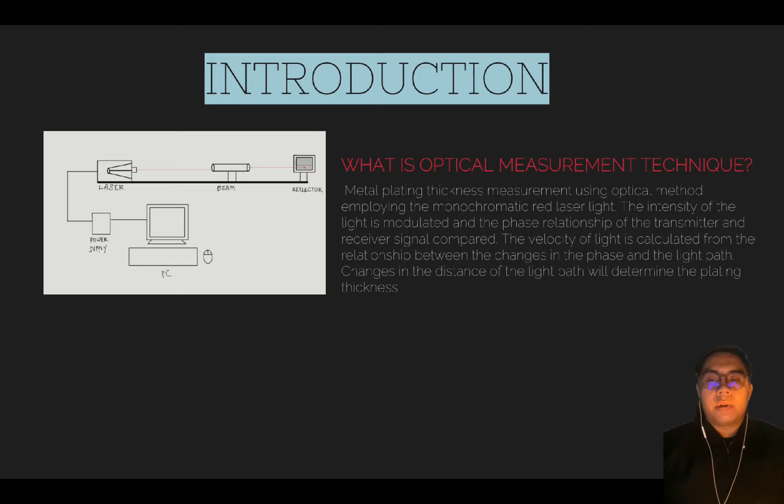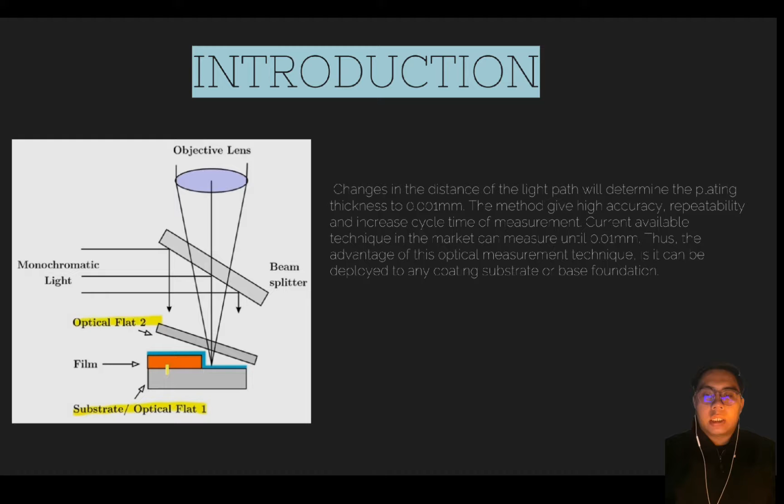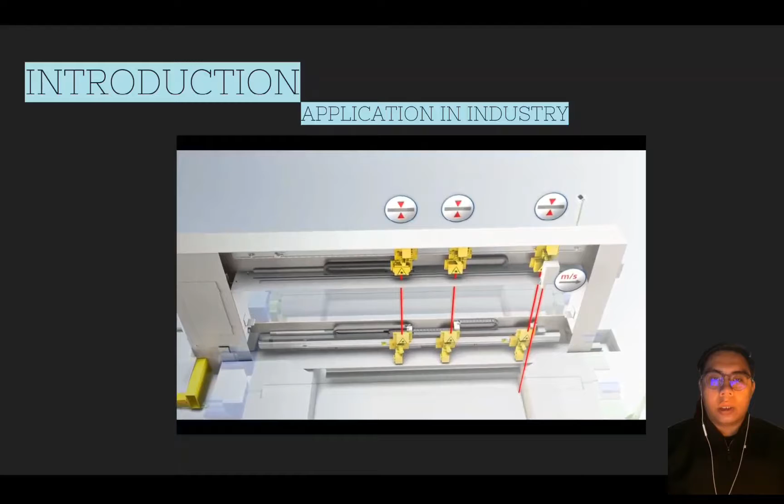Change in the distance of the light path will determine the plating thickness to 0.001 mm. The method gives high accuracy, repeatability, and increased cycle time of measurement. Current available technique in the market can measure until 0.01 mm. Thus, the advantage of this optical measurement technique is it can be deployed to any coating substrate or base foundation. As you can see, there are applications for optical monochromatic light, which is red laser, in the industry to determine or to measure the coating thickness.

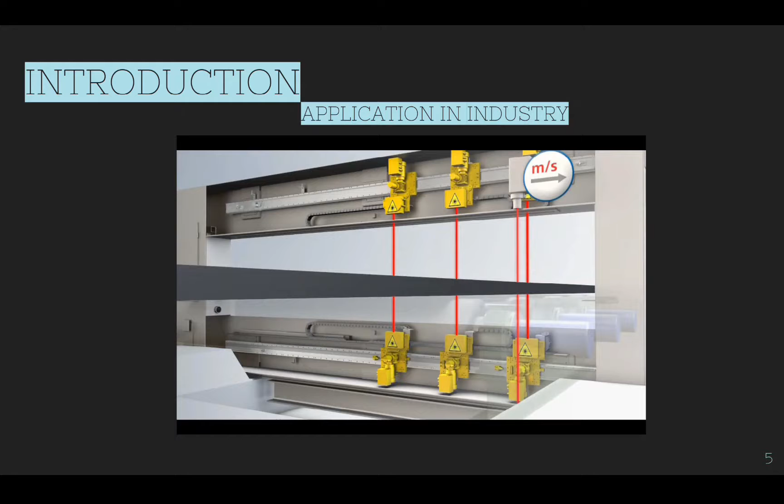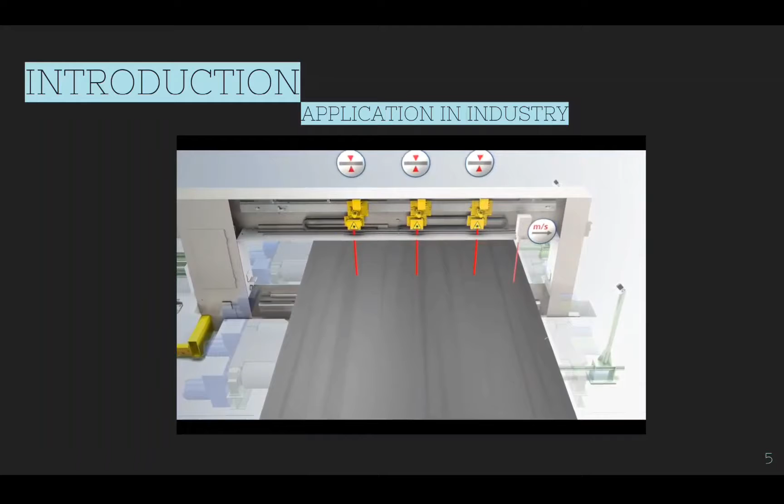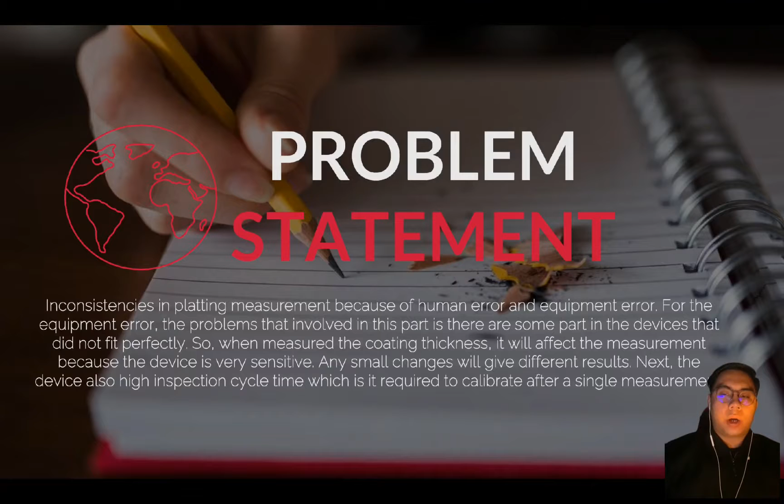For this project, the problem statement is inconsistency in plating measurement because of human error and equipment error. For the equipment error, the problem involved is there are some parts in the device that did not fit perfectly. So when measuring the coating thickness, it will affect the measurement because the device is very sensitive. Any small changes will give different results. Next, the device also has high inspection cycle time, which is it requires calibration after a single measurement.

My target for this project is I want to design a metal plating thickness measurement system with red laser monochromatic light and velocity receiver. Second, I want to improve the accuracy of the plating thickness measurement system to 0.001 mm. And last, I want to improve inspection cycle time compared to the current technique employed by the industry.

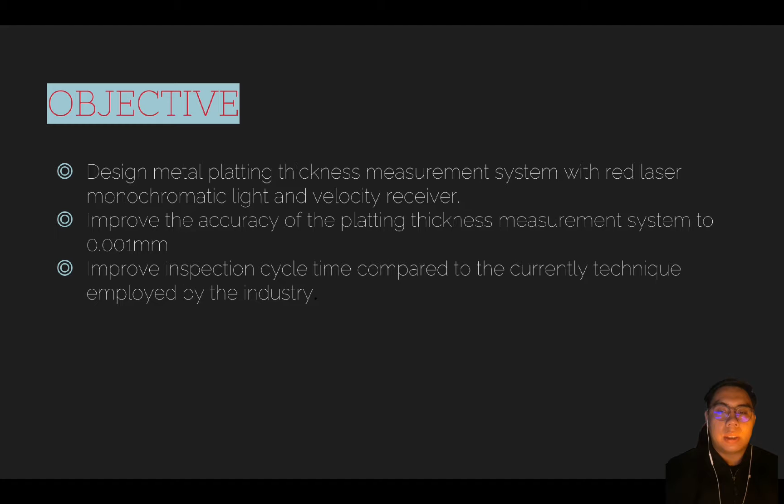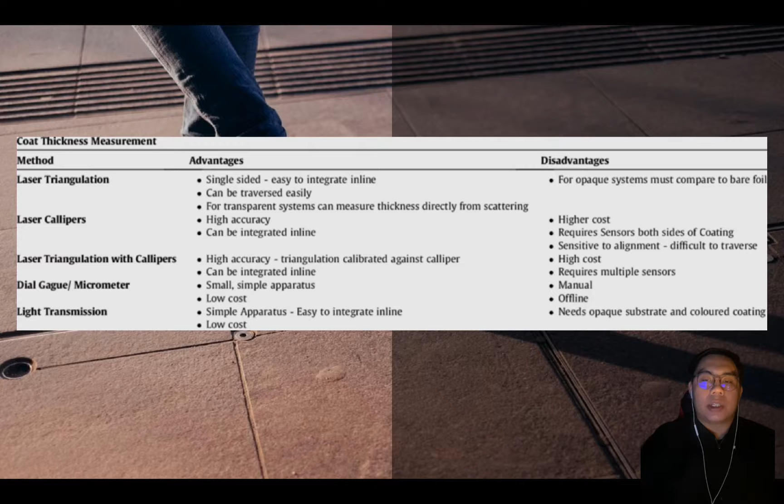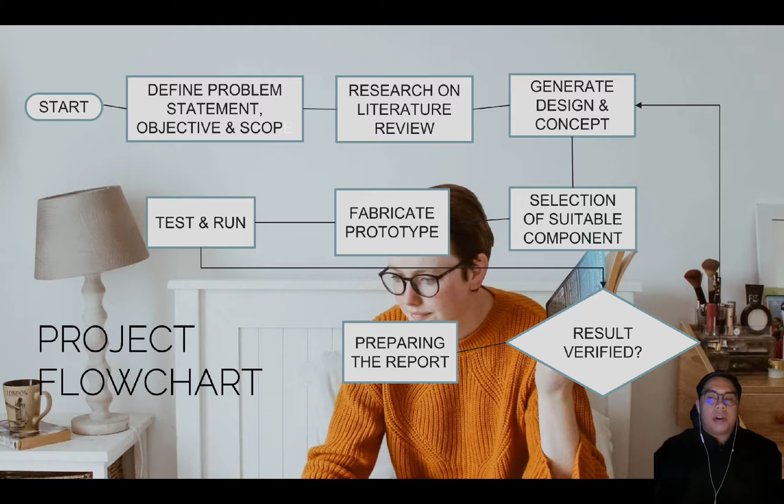This table provides 5 different methods, which are laser triangulation, laser calipers, laser triangulation with calipers, dial gauge or micrometer, and light transmission. For this project, the flowchart starts with define problem statement, objective and scope. Next, research on literature review. Third, generate design and concept. Fourth, selection of suitable component. Fifth, fabricate prototype. Sixth, test and run. Seventh, result verified. And last, preparing the report.

For the system flowchart, it starts with system calibrate, and then it goes to acquisition spectrum of reference mirror or acquisition spectrum within quartz glass, then comparison of central wavelength, and proceed to calculate thickness of quartz glass, while aberration correction for optical device or error correction for refractive index of multi-light.

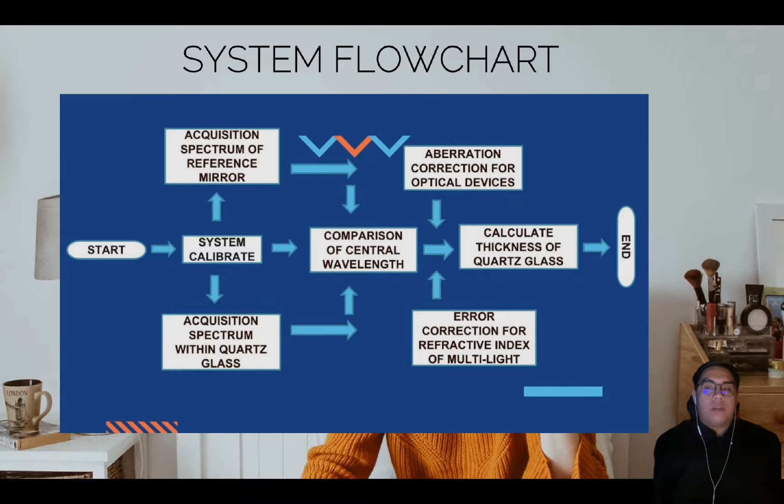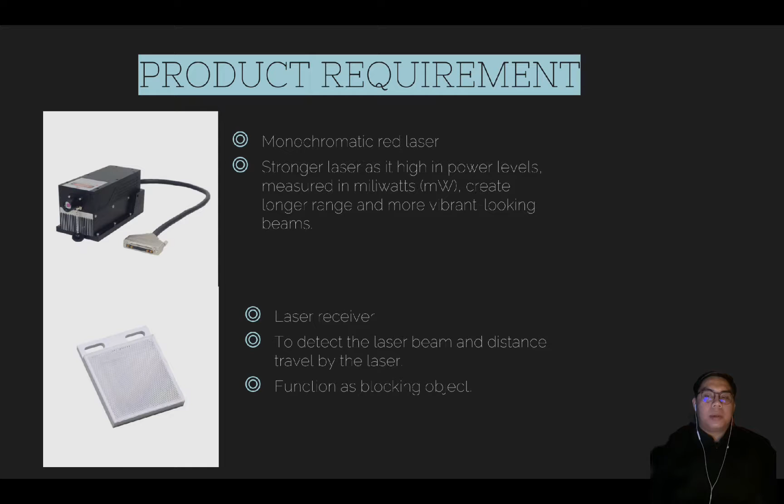Okay, we proceed to the next subtopic, which is methodology. For the product requirement, first, monochromatic red laser. It is a stronger laser as it is high in power level, measured in milliwatts, with longer range and more vibrant looking beams. Second, laser receiver, to detect the laser beam and distance traveled by the laser. It functions as a blocking object. Next, sample measurement holder. It places the sample between the holder and clamps the sample, so the sample stays perfectly still when taking the reading.

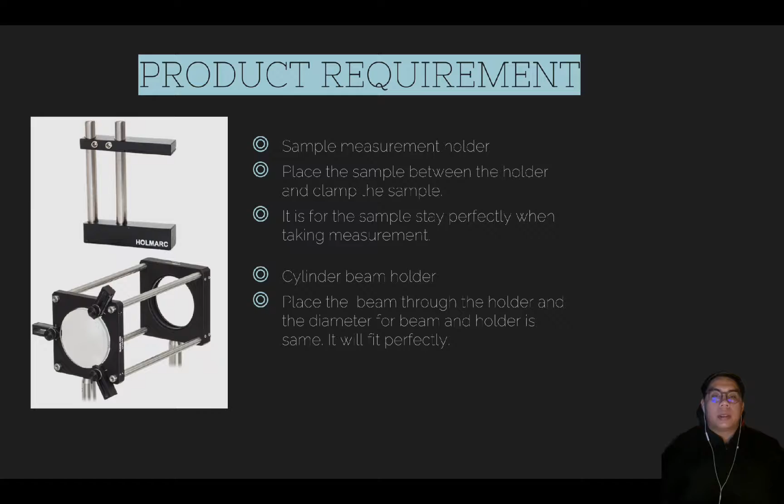And fourth, cylinder beam holder. Place the beam through the holder; the diameter for the beam and the holder is the same, so it will fit perfectly. Basically, how the system operates: the components for the detector are photo IC, IC support board, and interface board. When the laser emits to the reflector, it will reflect back diverging. After that, it will go through the lens and converge, focusing on the photo IC. Photo IC will detect the laser and give a signal to the IC support board.

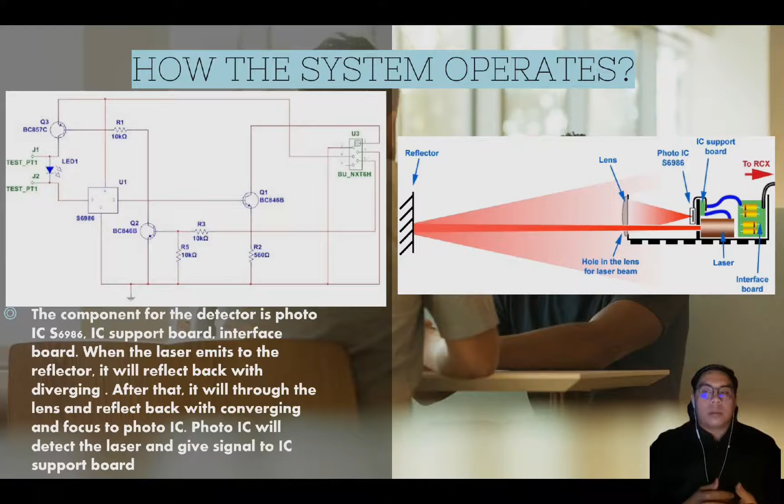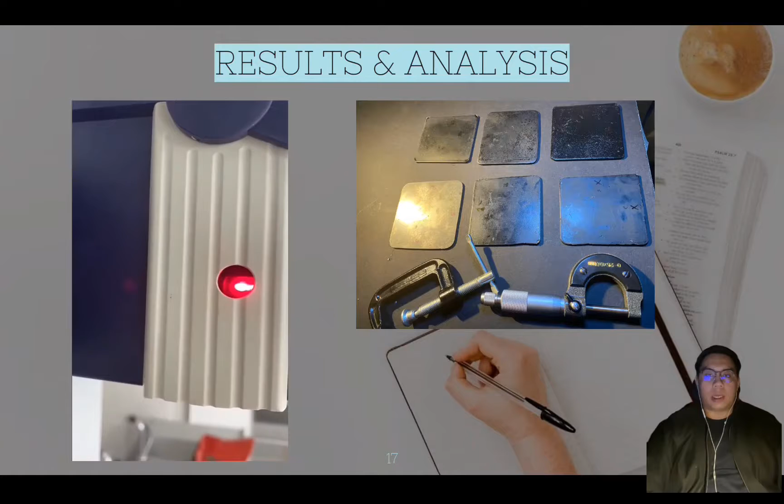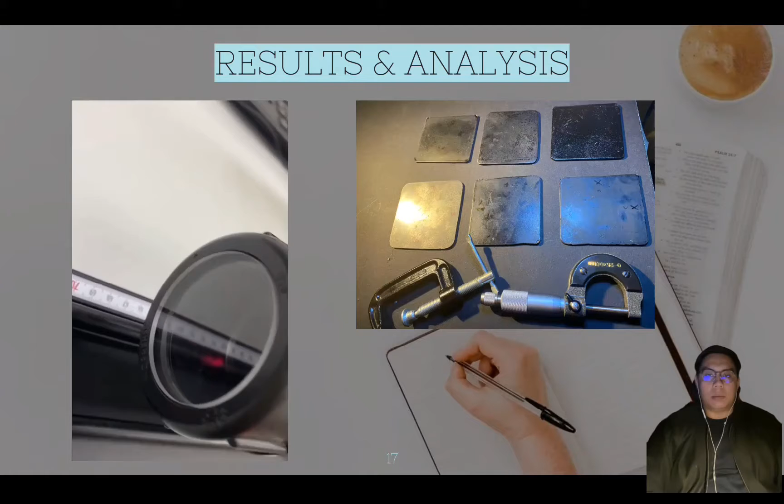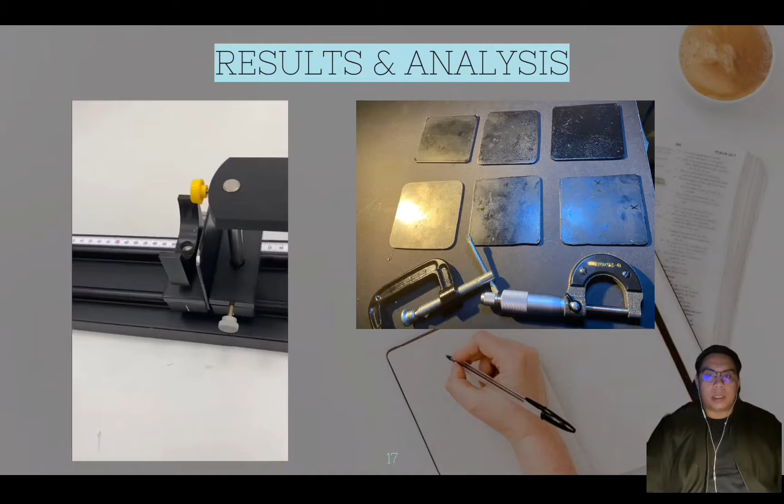We move to the next subtopic, result and analysis. For this project, we conduct an experiment. The procedure is we prepare 6 samples. One of the samples is before coating and the other 5 are after coating, but with different thickness and different number of coating layers applied. From the samples, we take coating thickness measurements with 2 different methods, which are micrometer and optical monochromatic technique using red laser. The collected data we can compare and analyze, and from the analysis we can make a conclusion from this experiment.

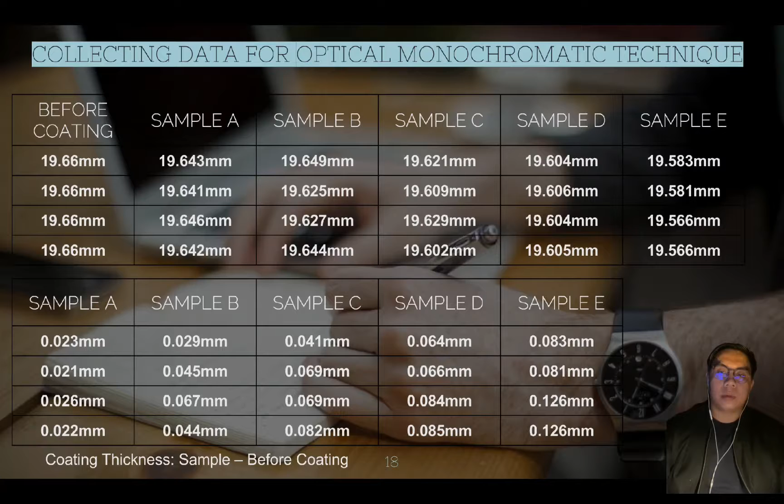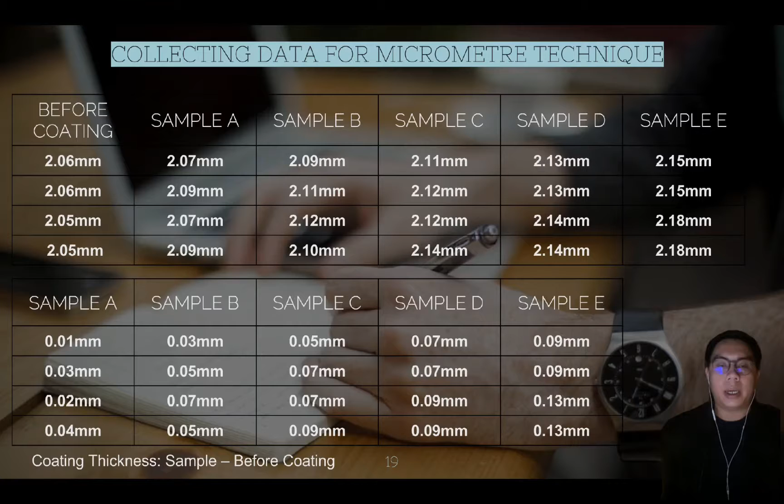Okay, for the conclusion, dimension measurement is required to assure top quality of product as per customer specification. Thickness gauges can be contact or non-contact type and use inductance, capacitance, laser technology and beta radiation for measuring the thickness of base materials and applied coating surfaces. The length of an object can be found by subjecting it to a laser source and noticing the shift in frequency of the laser beam.